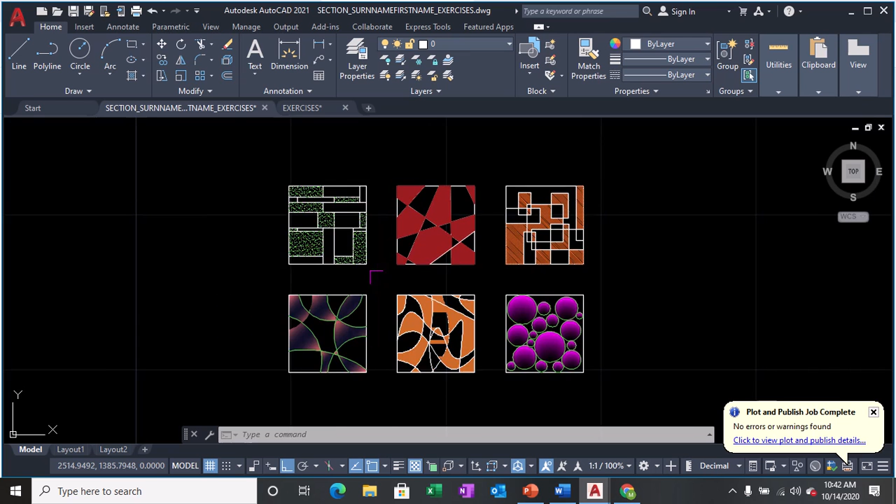Okay, so to continue with our exercise number 2, we have here a series of rectangles to be filled up with hatches and gradients and with combination of different 2D CAD objects. So these are actually 5 by 5, same distance with the previous rectangles from the previous exercise. So I'm just going to pan and just be duplicating it through copy, CO enter. So select this one, and this one.

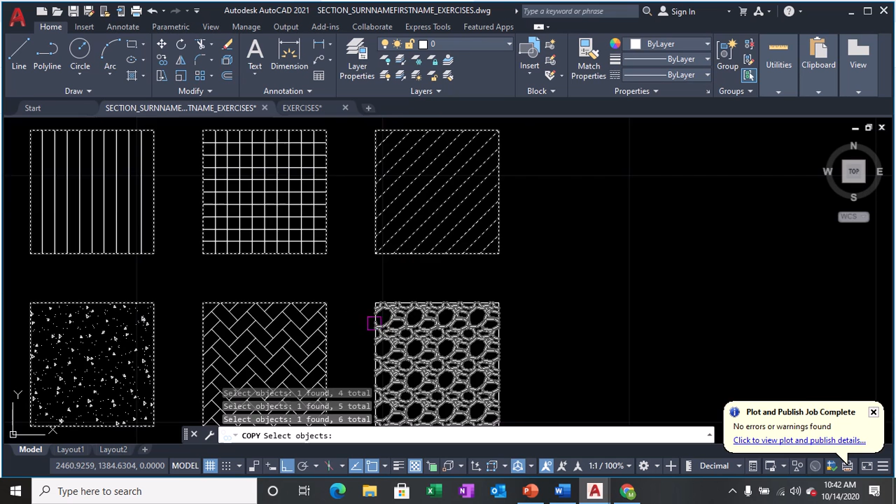Okay, so it's okay if there are already objects, we can just delete them later. Enter. Once you're done copying them, specify base point. So you just pick from here and guide them to the side. It's up to you if you want it on the right or left side. So just click as your point of displacement.

Enter once you're done. So zoom in. We have an excess here. So that's E. Enter. Select this one and enter.

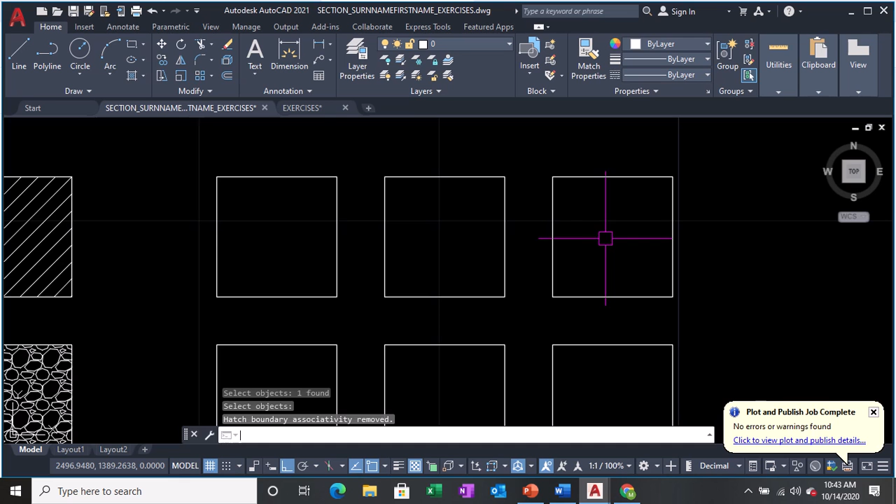And after that, we have straight lines here, vertical and horizontal. So zoom in on this. Then I will be turning snap off. Bakit? Because when you type L, enter, if you have snap on, the points will go there. So again, just pick 1 and 2, enter, and another enter to terminate.

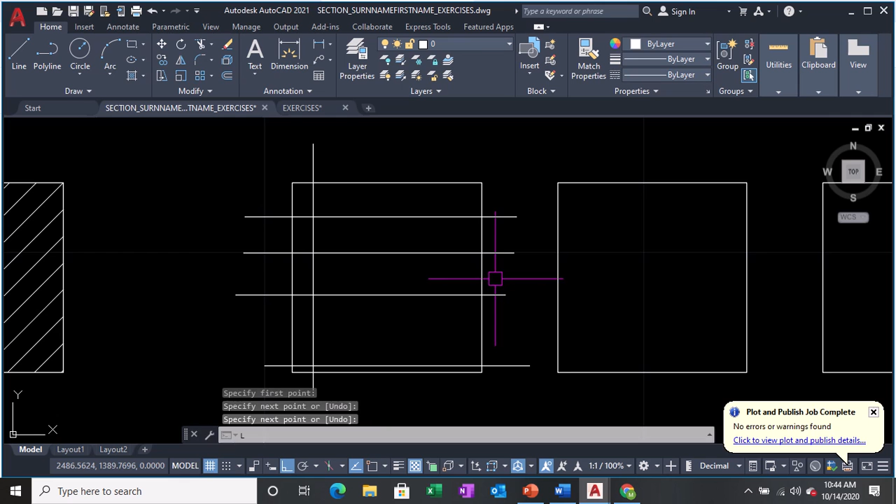So, pick 1 and 2, enter, L, enter. You can click anywhere. L, enter, just pick 2 points at a time. L, enter. L, enter. Enter again.

So again, you can click a series of straight, horizontal, and vertical lines. Then after that, type TR, enter, and click all those unwanted objects outside your rectangle.

The one that I'm using, it's called cursor. Our cursor this time is pick box. So whenever you are prompted to select object, your AutoCAD cursor turns into a pick box, okay?

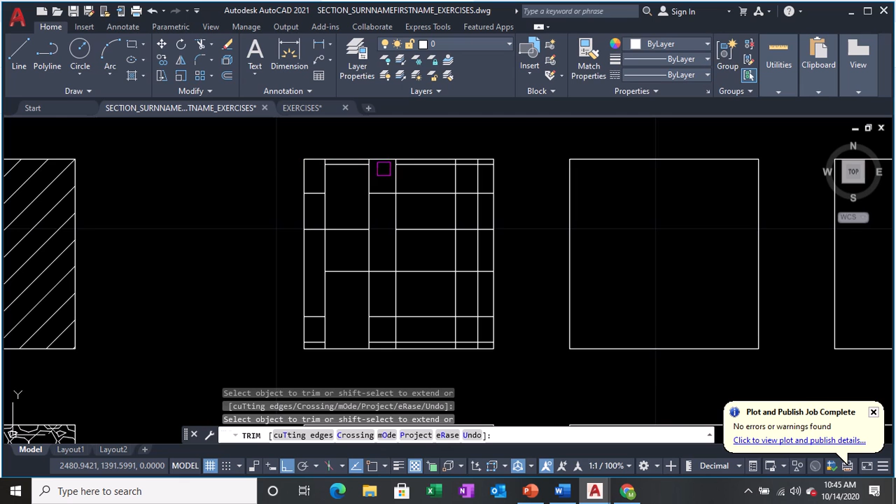So here, I will be trimming here, this one, this part, this, and also here. Again, it's your discretion on how you are going to deal with this, on what type of object you will be eliminating.

Okay, you don't have to copy exactly my output. Again, that is your discretion on what you are going to do with your rectangles, provided for the first one you will be using straight, horizontal, and vertical lines.

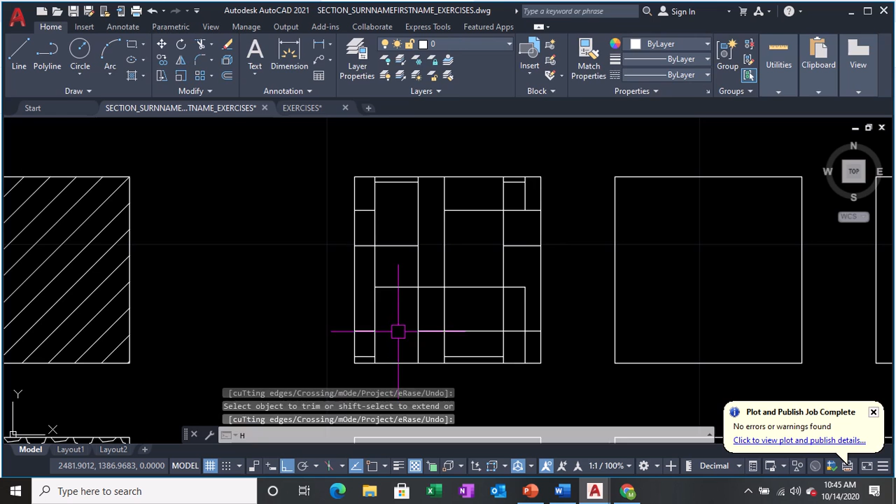Okay, so enter to terminate the trim command, and I will be doing hatch. H, enter. Okay, so I will be using user defined for the meantime. Spacing is 0.1. Under properties, I won't check the double option. So just here.

And then I will be picking here. And another one here. Another one here. There you go. Okay, and anyway, I'm fine with that.

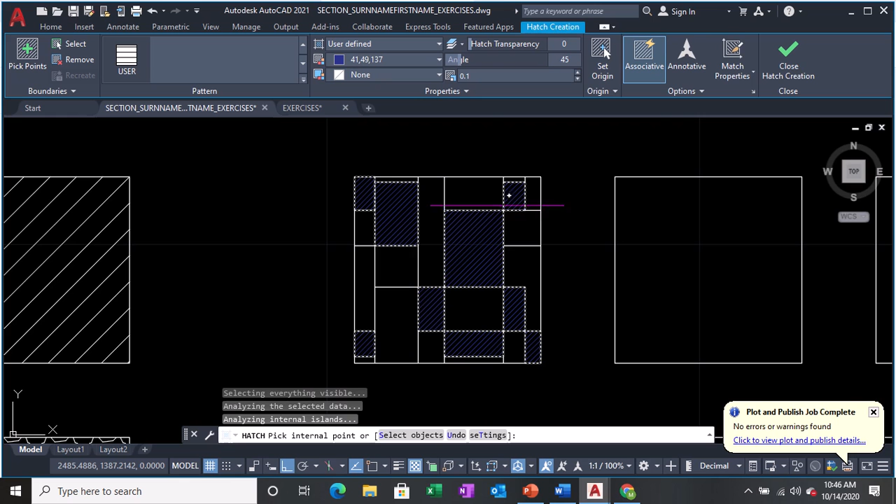So press enter. You can leave the other boundaries unhatched, or if you want, you can command for another H, enter, and look for solid this time. Okay, so C. Let's see. Yellow. Okay, click.

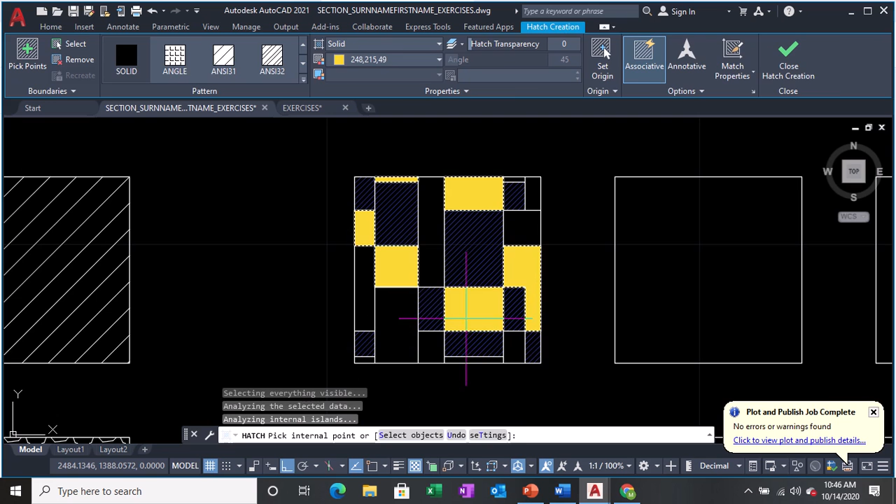Okay, so I'll be fine with this for the rectangle number 1. Okay, so don't forget to Control S every at least 5 commands.

Next is we have a series of diagonal lines. L, enter. So again, I would really suggest you turn ortho off this time, and you pick 1 and 2, enter. Enter to repeat. 1 and 2, enter, and enter to repeat the previous command, which was the line command.

Then you pick 2 points, enter. So again, you don't have to copy, or you don't have to be identical with my output.

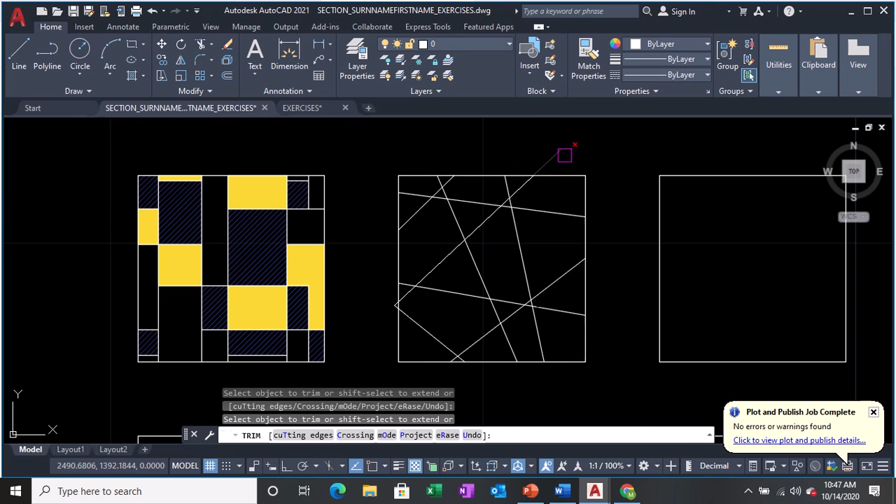And TR, enter. So select those unwanted objects by trim. Not just outside the rectangle, but again, you can also do it inside.

Okay, there you go. I think I'm fine with this. Enter. And for this one, I will be using H, enter.

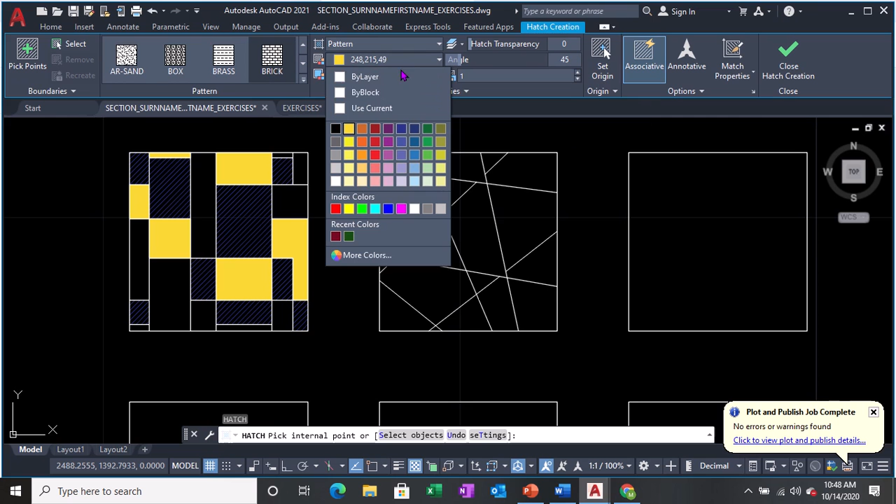Instead of solid, I will be using pattern. Okay, so from here, maybe, oh, I think brick is fine with me. Brick, then color, I will be changing it to something, okay, this will do. Sort of maroon or mulberry.

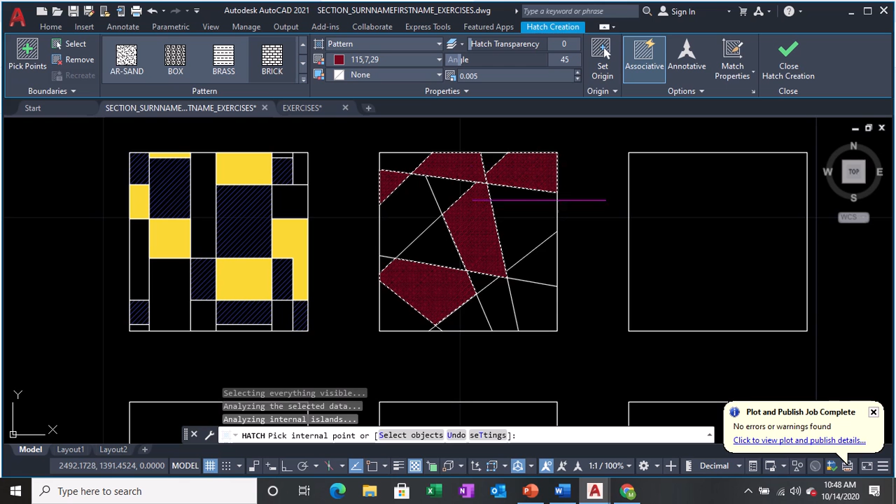At 45 degrees, it's fine with that. I will be typing 0.005, enter. Okay, enter. Okay, hatch again. So this time I will be using solid, and color will be, maybe, yellow again.

Okay, you can just click randomly. Or if you want to fill everything, every bounded area, it's up to you.

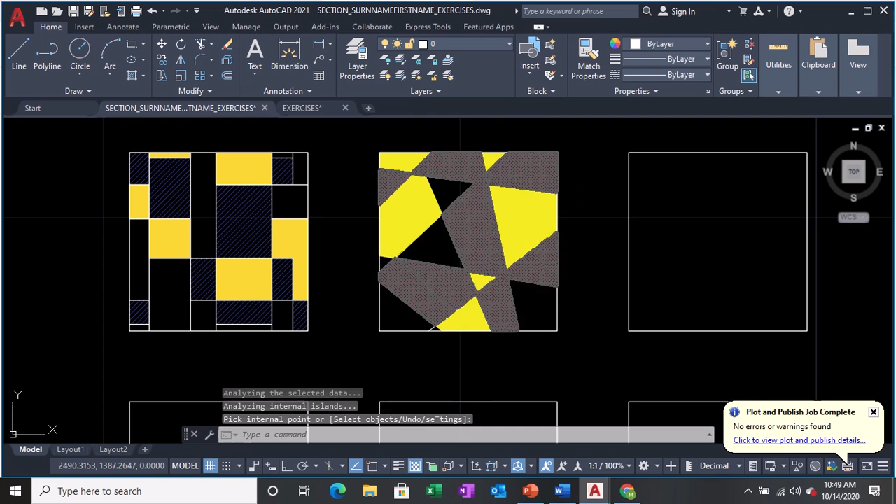And for this one will be a series of rectangle, REC, enter. So you pick one and there you go. Enter to repeat rectangle. You click here, you click outside, it's up to you.

REC, enter. Just pick two opposite points, 1 and 2. REC, enter. Pick from here, down here. REC, enter. You pick from here, up there.

And TR. So you remove the excess. You can always undo the last action, okay? By Control Z, even if the command is active.

REC, enter. Pick 1 and 2. So let me add a bit more to it. Pick 1 and 2. Enter. And TR, enter. And eliminate this.

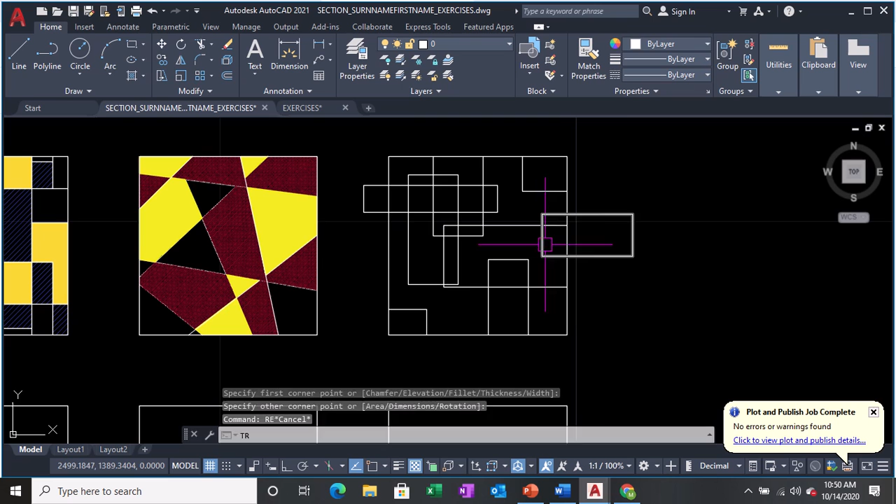Then again, you can do GD for this time. GD, enter. So this is my pattern. Again, randomly, you can click anywhere.

Okay, I'm good with that. Enter. And maybe another hatch. Enter.

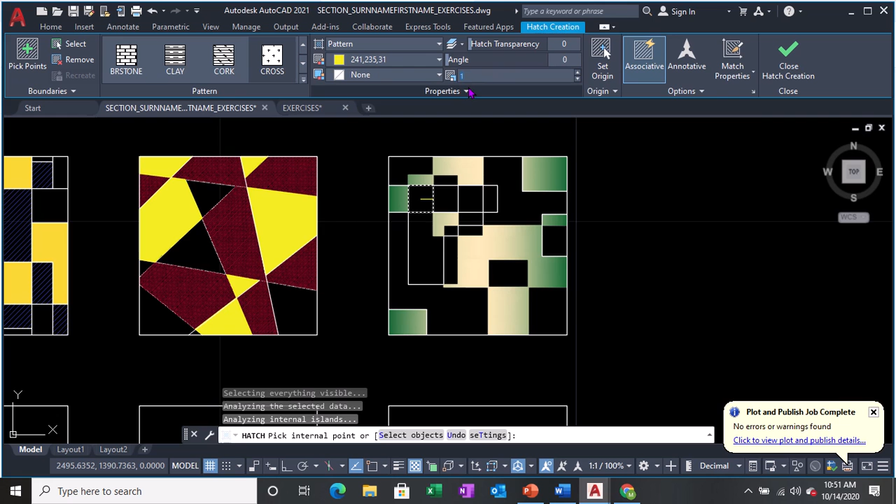I want to use pattern again. Click here for pattern, or the cross one, click cross, or it's up to you. This one is too big, so I will try typing 0.005, enter, okay that's it. Or if you want a bigger one, let's make this 0.01 instead.

Click the other parts of your drawing that you want to fill up with those patterns. Enter. If you want, you can leave the others blank, just like this.

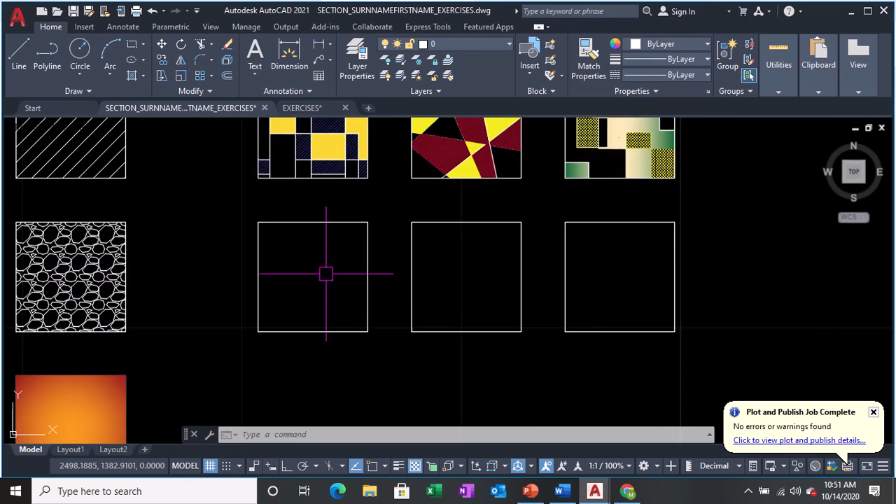Because if you have ortho on, it's a bit hard to modify your arc. If your OSNAP is on, you pick here, it might go to the midpoint instead. Anyway, that's point 1, 2, and 3 upon arc command.

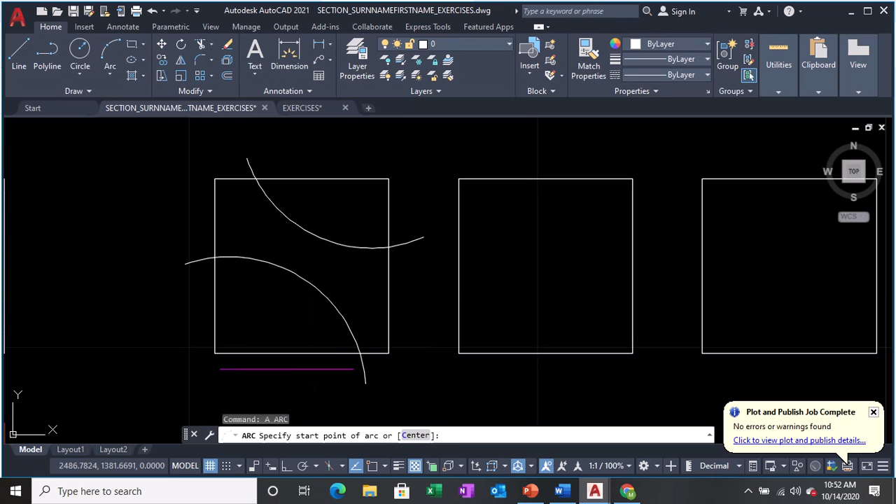Another A, enter, 1, 2, and 3. A, enter, 1, 2, and 3. Just repeat it. A, enter, 1, 2, and 3, enter to repeat your previous command which was arc. 1, 2, and 3, and enter to repeat. Again, you have to pick 3 points upon the creation of an arc object.

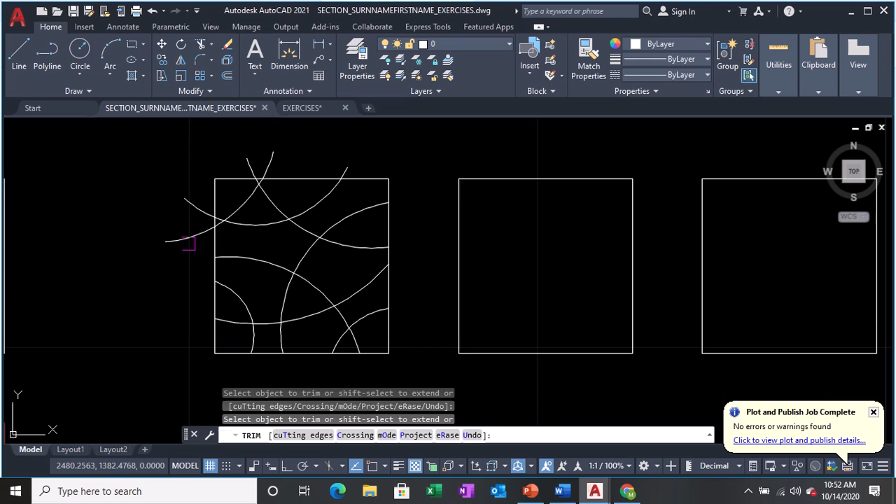After that, we're just going to trim all the unnecessary objects. That's TR, enter again. Class, in previous versions you have to double press enter for trim command, but with version 2021, even just one enter. So H again, click here, there.

I'll just close this. Okay, and there you go.

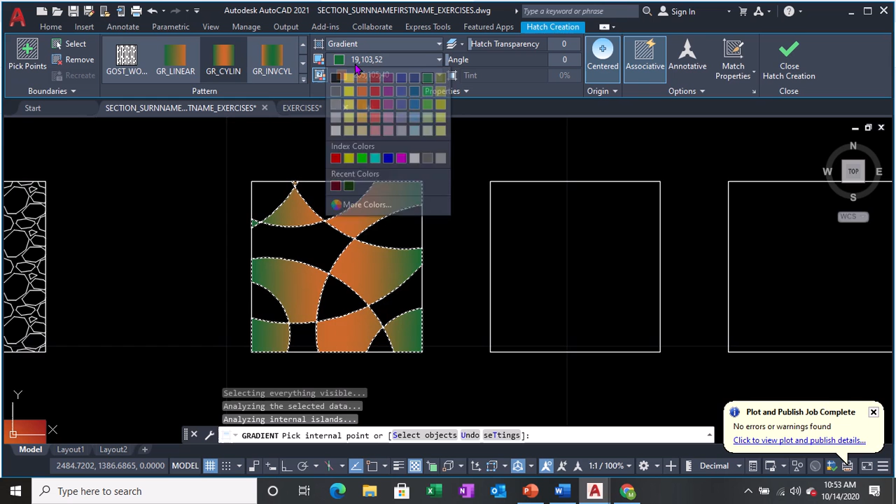I want to change my color to orange and maybe red, or this one and this, and change my angle into that. Close, and again I will be leaving this blank, but if you want to have them hatched or filled with gradient, it's up to you.

Next will be SPL for splines, so you can pick anywhere. Make sure again ortho and OSNAP is off. So just 1, 2, 3, 4, 5, 6, 7, 8, and there you go.

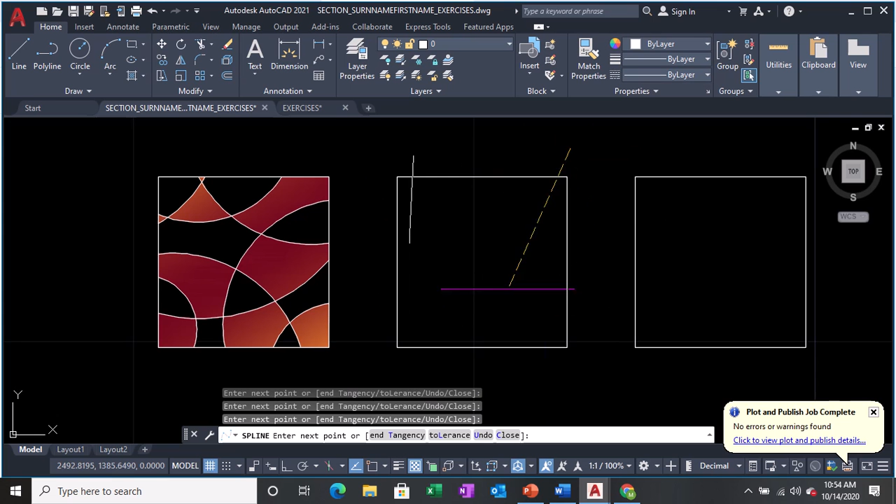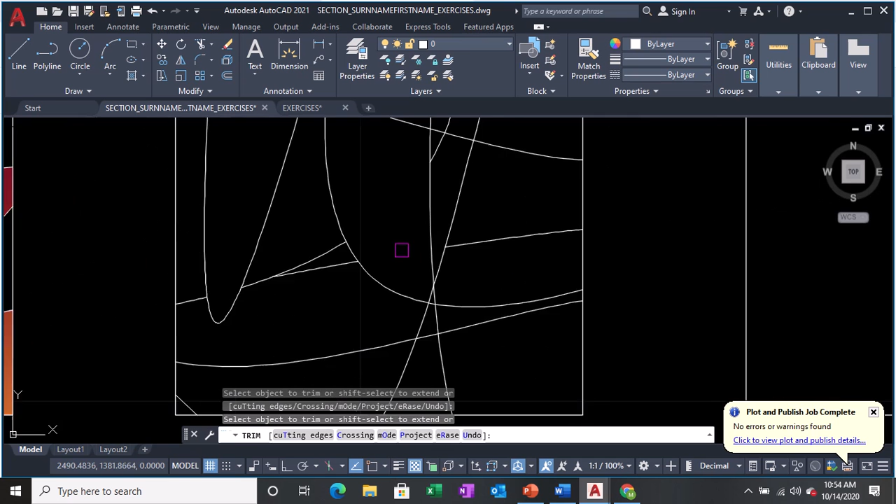After trimming them, you can already fill them up with different patterns. You can still trim inside in case there are other parts of your spline that you want to fix or redefine. So it's okay, I'm good with this.

I'll be filling this up with another H command. This time I will be using user defined. Angle is 0, so let's try 0.05. And then for the color, maybe blue, okay.

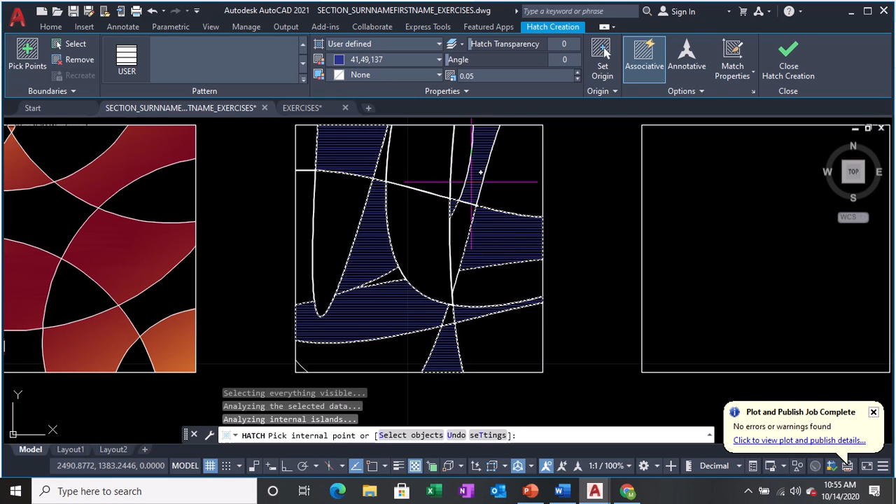Again, make sure that the area is bounded. Okay, so I'm good with this. Enter, and enter to repeat. Same as before, but I will just be changing my color. Okay, so I'm good with this.

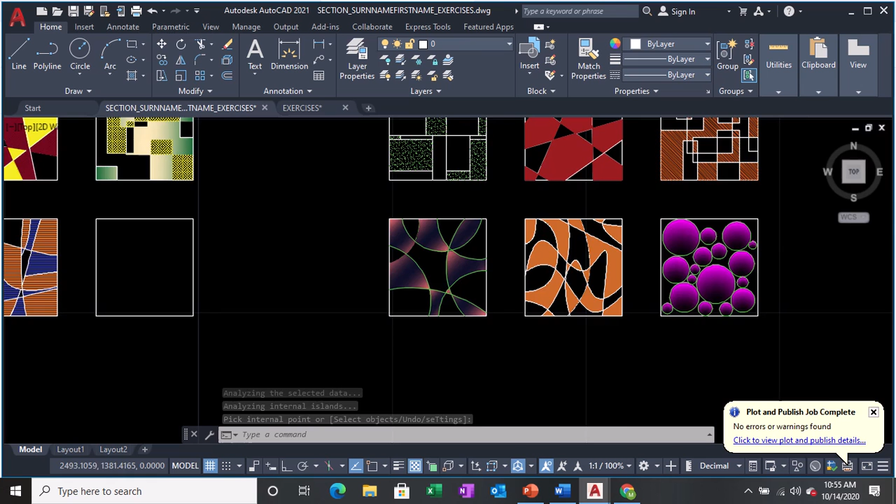Next will be a series of circles. So your circle command, enter. You pick anywhere, say here. And enter to repeat. You can have it pick from here, it can go outward, and enter.

You can have it overlapping, or you can enter and copy it.

Whatever outcome you want. I just want to see circles for this rectangle, this one is line, that one is overlapping arcs, and so on.

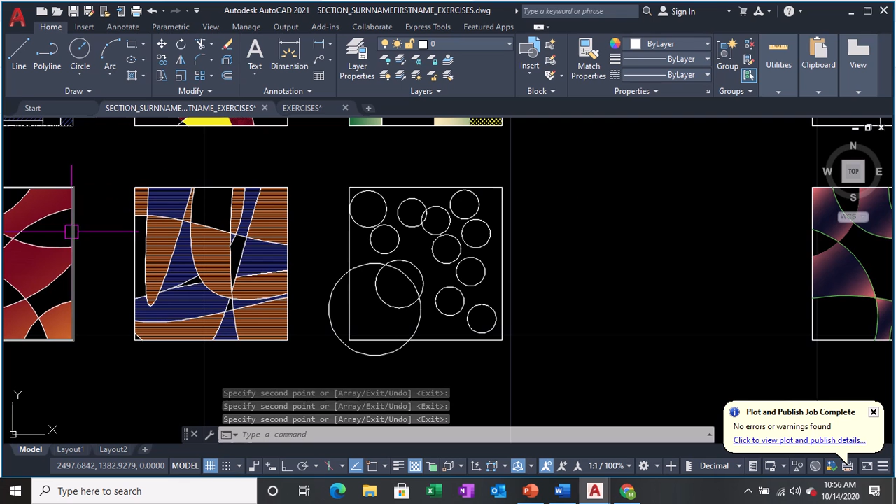So TR to eliminate excess, and again you can command H, enter. This time, it can be the area beyond the circle or within it. Okay, so enter. So we're done.

Don't forget to quick save once you're done. So once the drawing is already completed, the next step is you're going to prepare them for printing or plotting. So from the CAD file, we will be converting them into PDF.

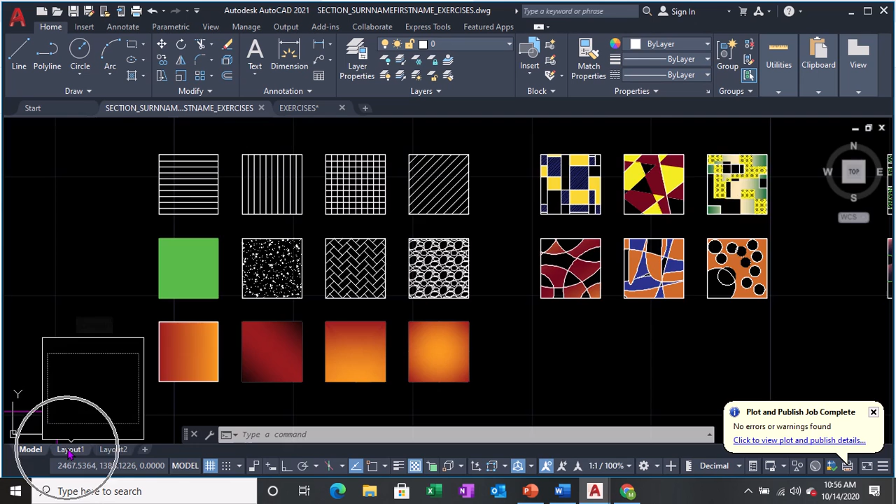So how do we do that? First, we are in the model tab, so let's go back, or let's go to layout. Layout is intended for preparing your objects, preparing your drawings for printing. You will actually see, when you switch from model to layout, a default viewport.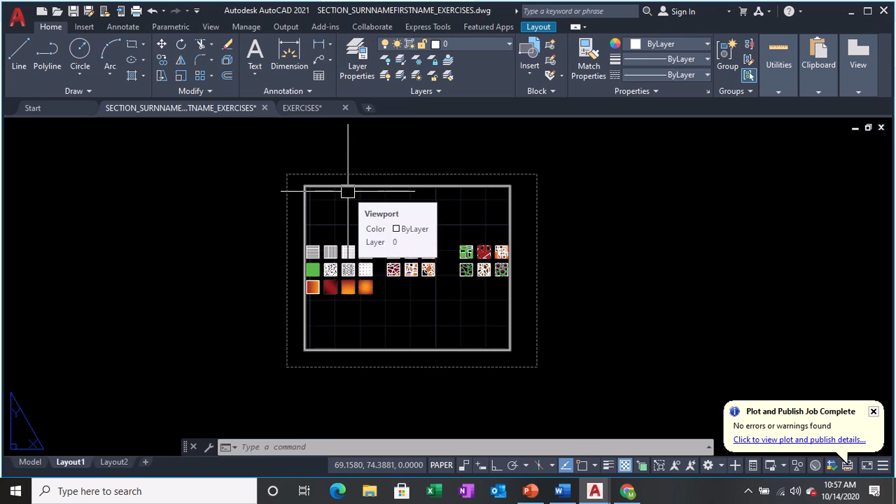That default viewport of ours can actually be eliminated and we're going to create a new one. So we're going to delete this by erase command, enter, select, enter. We're going to create a short bond size.

Let's convert your drawing into the size of short bond paper. Our short bond has a size of 8.5 inches and 11 inches. So we're going to make a layout on a landscape format.

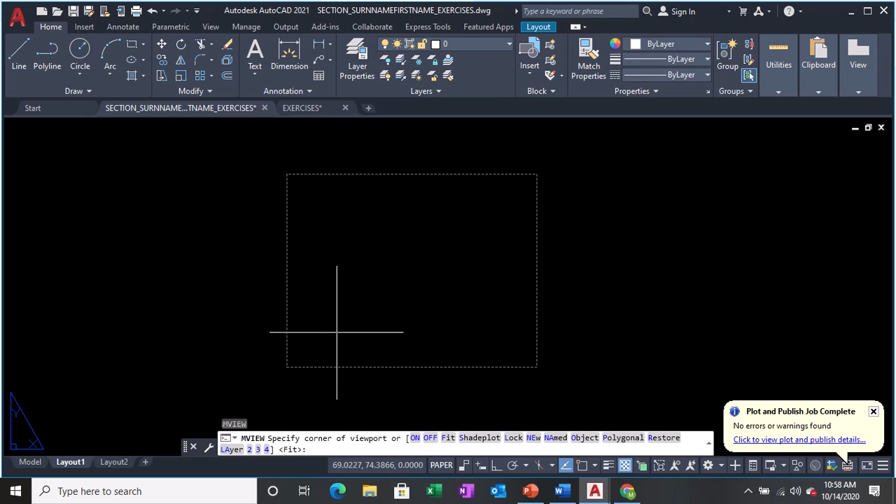So, pahiga yon. Ang gagawin ni ma'am, magko-command siya ng MV, enter. I will be picking 1 point. Okay, so eto na yung bond paper natin. What we're going to do is to specify the size.

So that's at 0.28. Ano yung 0.28? That is your X, yung dimension dito. Saan galing si 0.28? That is 11 inches of your bond paper converted into meters. Pag sinukat mo sa meter, yung longest side of bond paper, that is 0.28 m. Bakit kinonvert natin ang bond paper into meter? Kasi gamit natin drawing unit is meter, so dapat tumutugma sila.

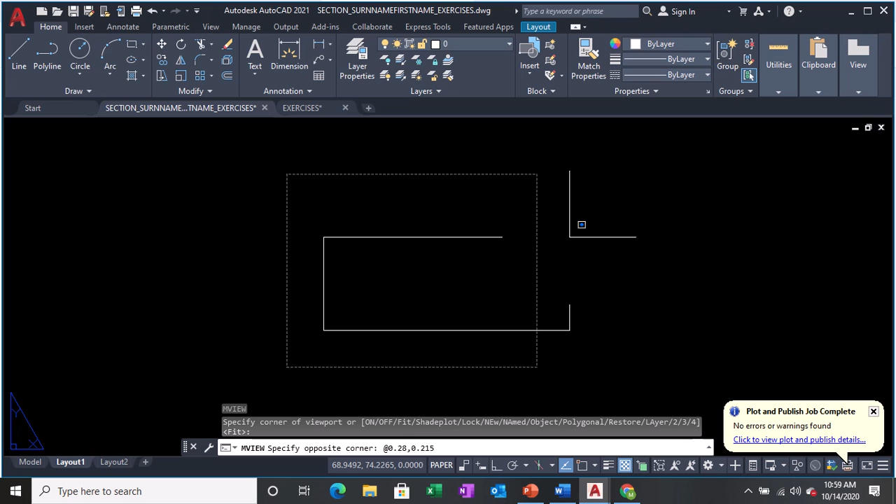So ayan yung longest part, comma, 0.215. Bakit 0.215? That is the 8.5 inches, kinonvert natin siya ng meter. Anyway, I'm going to press enter. There you go, you already have your layout set for short bond paper, which is 11 inches by 8.5 inches in landscape. Pwede kasing portrait or patayo, but we will be using the landscape option this time.

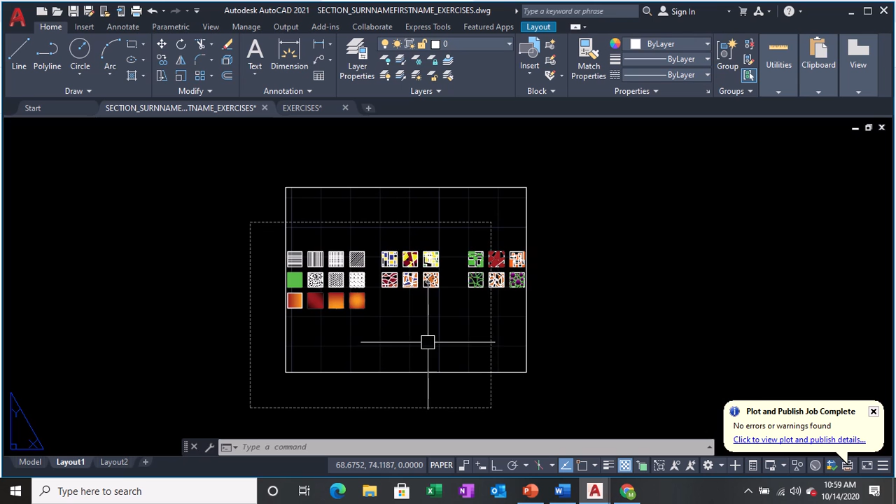Now, ano ito? This is a viewport or parang window dun sa model. Lahat ng ginawa mo sa model, pag pupunta ka ng layout, makikita mo, provided you have a viewport. Viewport, portal for viewing, para makita mo yun sa model. You can actually print also sa model, but based on my experience using CAD, I would really advise you to use layout when it comes to printing.

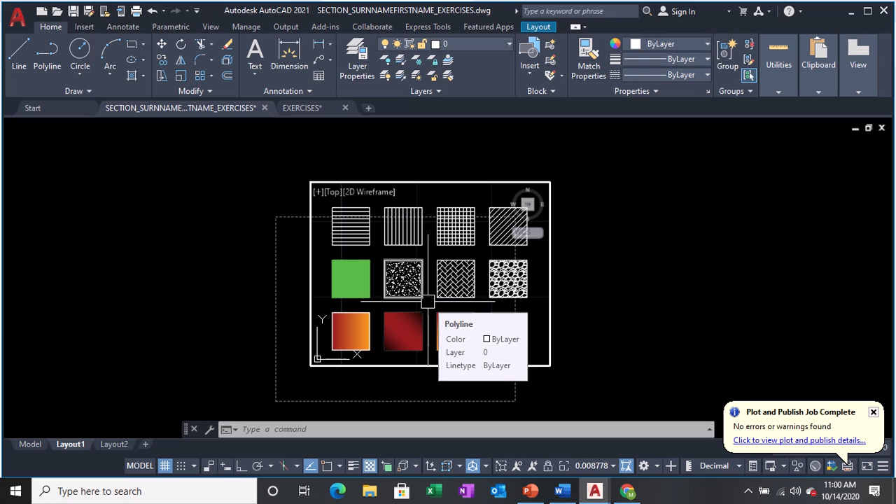Anyway, this is already our paper. When we pan, when we zoom in, napapan yung paper. But when we double-click inside, ayan, so pwede tayong ipan, pwede nating i-zoom in, and this is our drawing. This is our paper, this is our drawing. You see the ratio of your paper, short bond, and your objects. So double-click sa labas, para pag nag-pan at nag-zoom in, zoom out, hindi na magagalaw yung drawing na sinet natin sa loob.

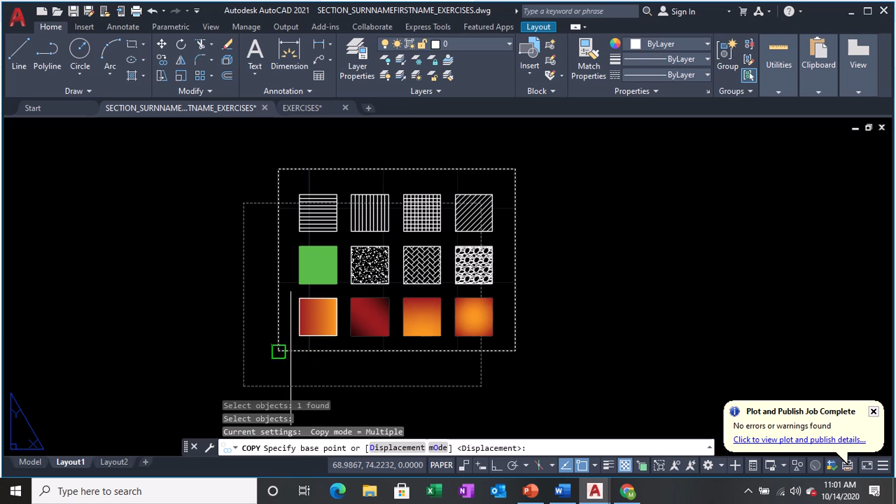Okay, now we're going to copy this viewport. Enter. Again, this viewport has a size of short bond, yan yung sinet up natin earlier, yung MV at 0.28, 0.215. Anyway, I'm going to copy this. Enter. Okay, click here, and dito ulit. So I have two viewports, or I have two portals viewing my model.

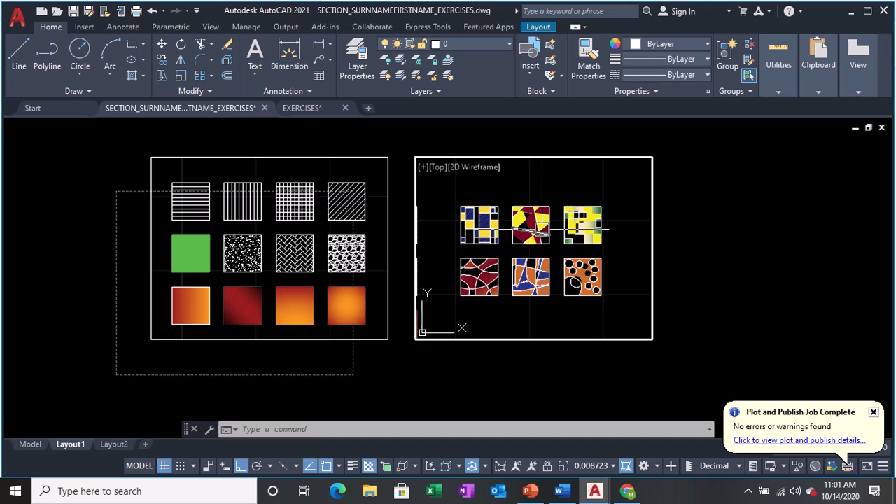Now, for this portal, i-double click ko yan sa loob, papalitan ko, and I will be switching my view doon sa another set of rectangle. And using your scroll wheel, zoom in natin siya at ipan ulit sa gitna. Kasi kung masyado siya maliit, ayan, makikita mo naman, this is your paper, this is just your drawing, so sayang naman siya. And actually, this can be scaled, pwede maglagay ng scale 1:100, 1:50, but dito muna tayo, not to scale muna yung objects.

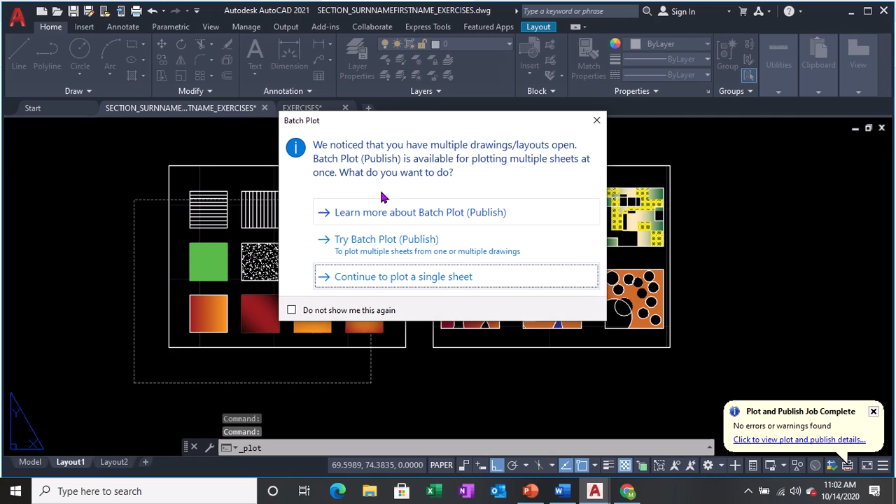Anyway, so after this, once okay na yung drawing, once okay na siya sa pagkakalagay sa paper mo, you double click outside. So that's it. The next is by plotting or printing command para ma-convert na siya fully into PDF. So that's Control P or plot command. If this screen popped up, you just click continue. Okay, then after that, look for the printer or plotter.

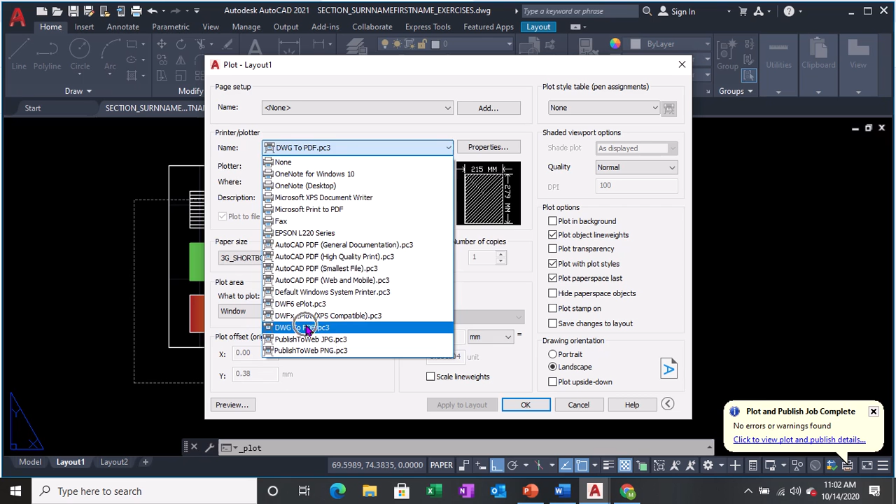When you click this, you will have the default electronic printer of AutoCAD. If you have an installed printer, makikita niyo siya, just like mine, I have an Epson. We will be printing it through PDF, converting the DWG or drawing file to PDF, so select this, and after that you have to select the paper size. Sa paper size, marami nakaset, pwede kang pumili dyan. Remember yung layout natin, sinet natin siya sa short bond, meron naman short bond dyan, but I want you to know how to set a paper size in AutoCAD.

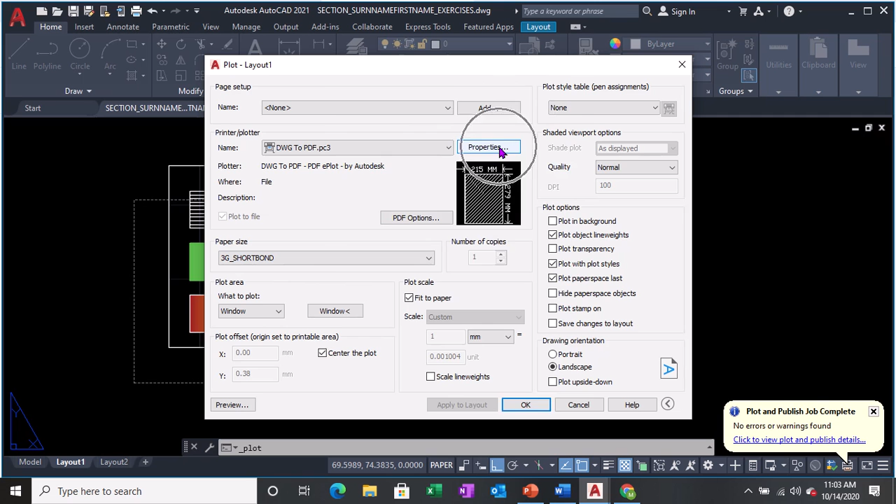Because printing in AutoCAD is not just limited to short bond, diba? Meron mga 20 by 30, A3, 15 by 20, 30 by 40. So you know how to set one. Example natin yung short bond. So to set a new paper size, you click here sa Properties, Custom Paper Sizes, select, Add, Start from Scratch, then click Next, and then you will see here the media bounds, or these are the area wherein our paper is set to size.

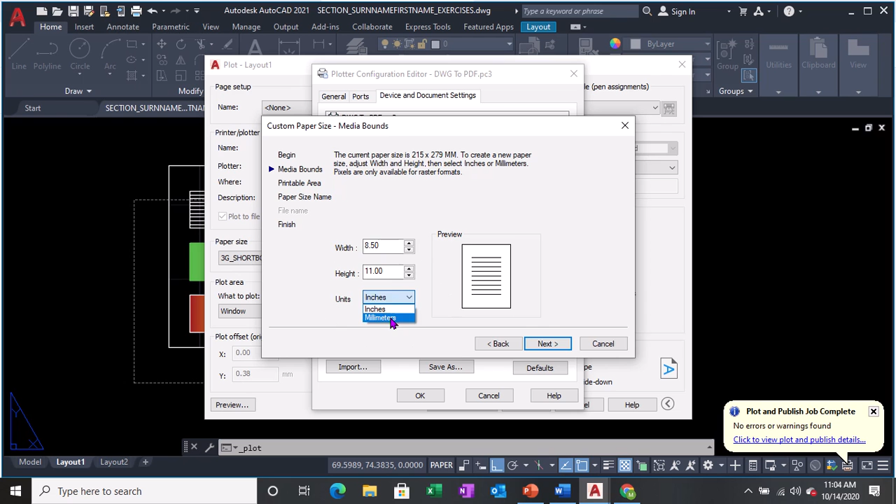Short bond tayo, uulitin natin siya dito. So kunwari, hindi mo tanda yung pagkaka-convert ng 8.5 at 11 sa millimeters or sa meters, punta ka muna sa inches, so you specify here. Let's say kailangan mo ng 30 by 20, ilagay mo dyan. But since we are just using short bond at yun po yung default, so let us just accept this and balik tayo dito, go back to millimeters, and click Next.

Printable area, you see the blue lines. Objects beyond that line are no longer printable. So let us maximize the paper and set everything to 0.

And click Next, paper name, just name it whatever you prefer. Mine is short bond. You can also set long bond paper there, or A4, depende dun sa gagamitin mo. And ulit, kung ano yung paper dito sa plotter, siya din dapat sa layout or sa screen mo.

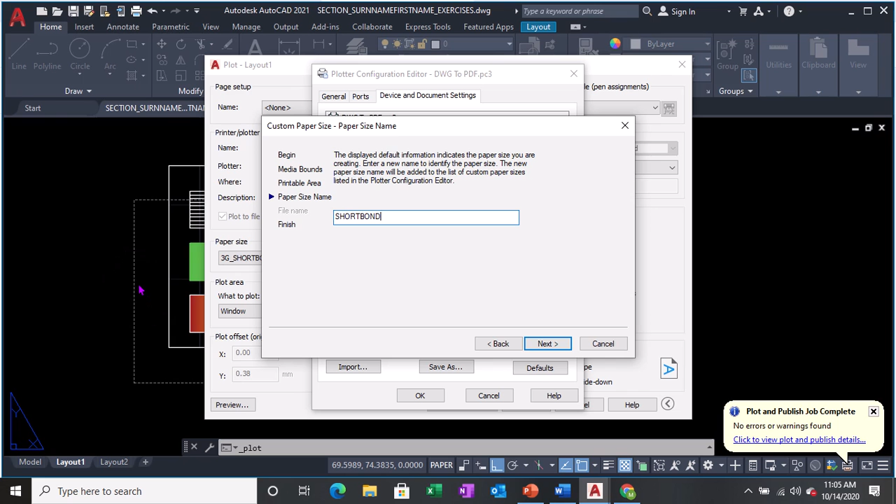And click Next, and just click Finish. So these are the set of short bonds created from previous classes. But anyway, just select and click OK.

And when you click this, eto na siya. They might be here sa baba or sa taas. Usually ganun, okay? So hanapin ko lang.

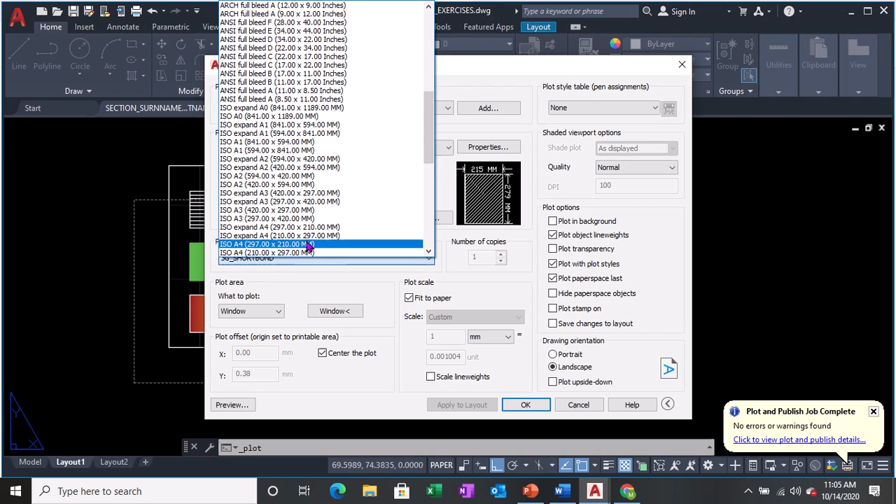Select short bond. Ulit, pag nag-Control P ka, uulitin ko lang: select the printer, select the paper size, and then what to plot.

So you click here, you have display, you have extents, you have layout, you have window. Disregard the others. Just always use window, and click window here.

Pag sinabing window sa AutoCAD, you have to pick two opposite points, 1 and 2.

Check fit to paper and check center the plot. So those are one of them, or just 5 of them: printer, paper, window, plot scale or fit to paper, center the plot, and apply to layout and preview.

So this is it, ito na yung nasa screen ninyo. It's currently bounded by short bond paper as set earlier. But meron pa tayong konting kailangan ayusin.

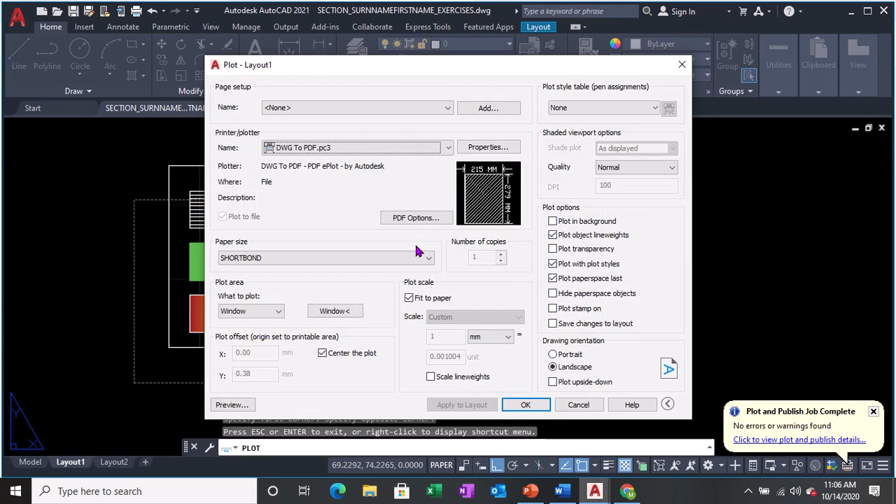Escape lang ako, and another escape. I will be creating a layer for our viewport para hindi siya printable.

Okay, currently we have a layer 0. Don't worry, we will be discussing layer 1 at a time. So to create a new layer, that's LA, enter, create a new layer.

I will be naming my layer as viewports. Okay, color niya, lahat ng object sa AutoCAD pag wala pang ibang nakaset na layer is color white, kasi pumapasok sila sa layer 0 wherein the default color is white. And we will change ours for viewports.

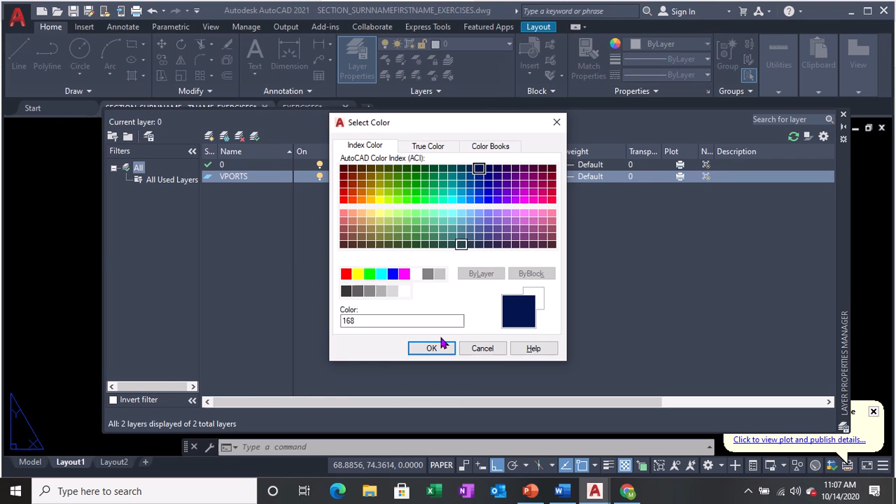We're going to make it blue. Ito, and click OK. And meron siya dito, plot option.

Plus, if medyo naka-minimize to, minsan hindi nyo siya makikita. For example, ito, yan, nakaganyan. Hindi siya ganong makikita. So look for plot, still sa tapat pa rin ng viewports, click no plot.

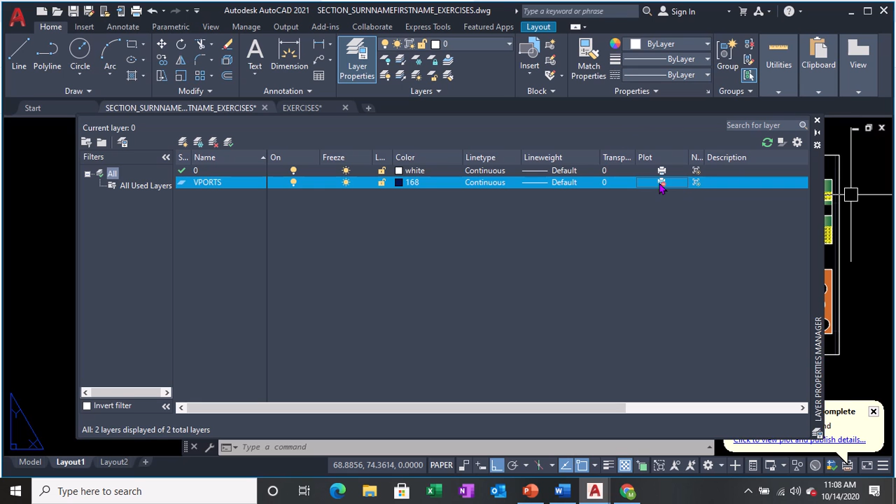Okay, so we will see what happens pag naka-no plot yung layer at pag naglagay ka ng object doon. Anyway, so just click or close this.

Select this and this viewports. Make sure you don't have any command in progress. You go here and you select viewports.

So nilipat natin sila ng layers, okay? Kaya nagiba sila ng kulay.

Now balik tayo sa Control P. Click lang to. And printer plotter, nakaset na yung previous settings natin: DWG to PDF, automatic na naka-install yan pag nag-install tayo ng AutoCAD.

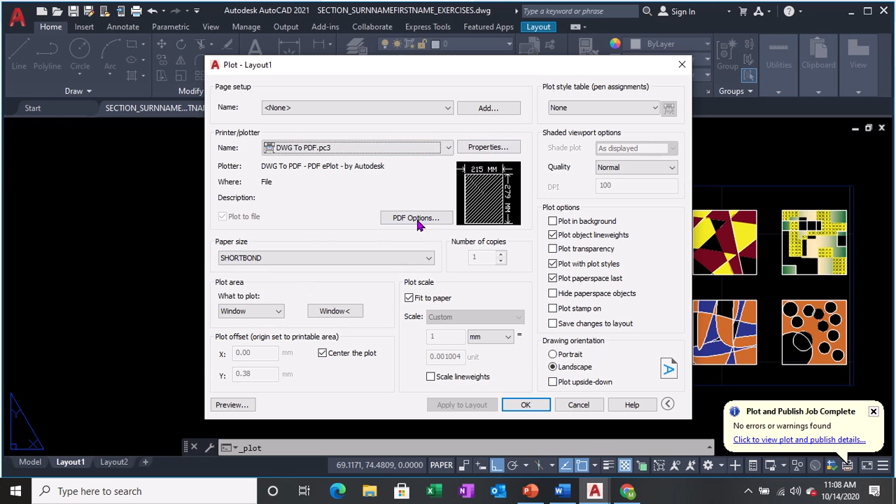Paper size, yung sinet natin sa properties kanina. Then okay na din yung fit to paper and center the plot. So click window, pick one and another one.

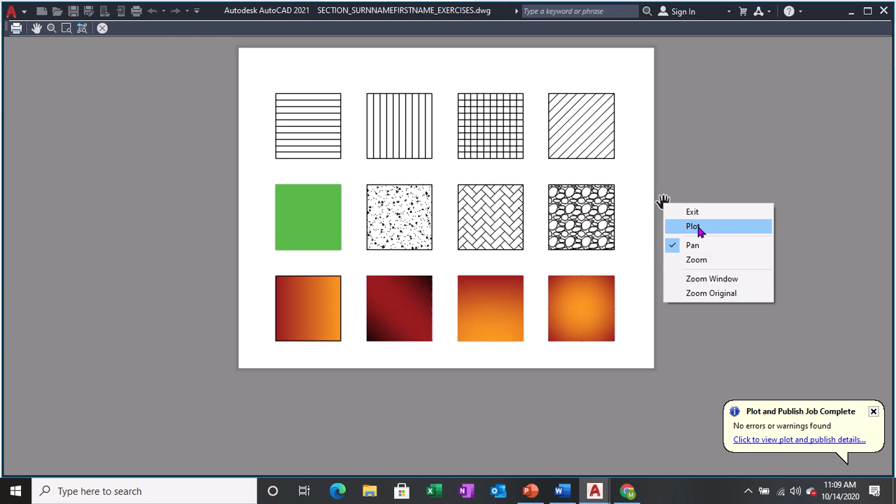Once you have selected plot, hanapin yung folder, you look for your own folder. Okay, lalagay ko na lang sa CAD exercises yung sa akin.

I will be naming my PDF as exercise 1. Huwag nyo na siya lagyan ng name kasi pag sinubmit nyo yan sa Google Classroom, magre-reflect naman yung name na nag-submit. Okay, CAD exercises, exercise number 1, and then click save.

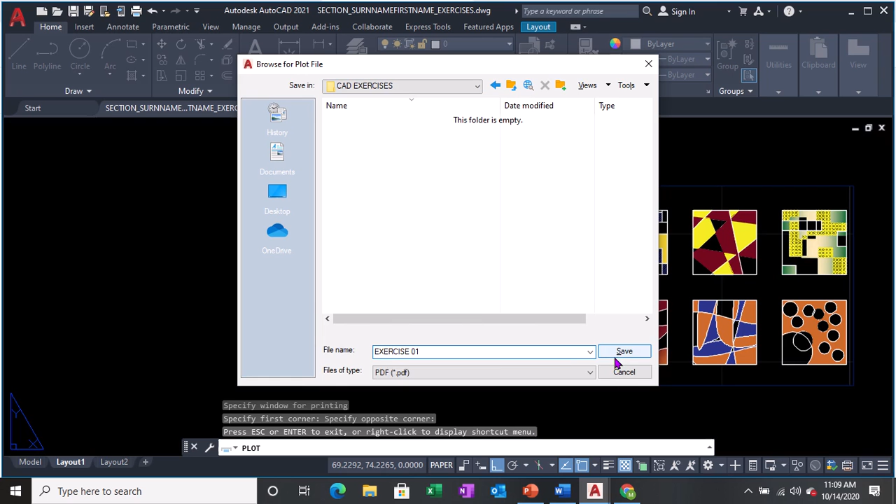Okay, so afterwards this will be showing on your screen. Ibig sabihin, out of the AutoCAD file, na-create yung PDF file na to. Okay, so I will be clicking close.

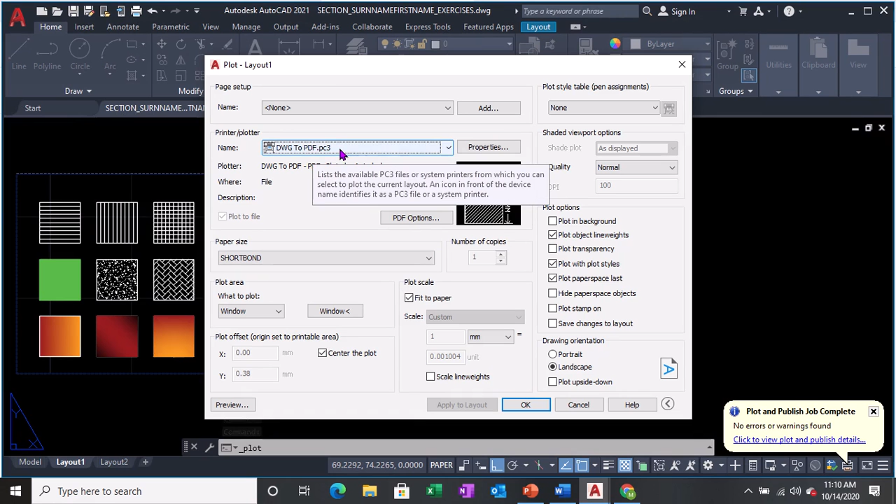And another Control P command, continue lang. So same settings pa rin as kanina: printer, paper size, fit to paper, center the plot, and window.

You pick two opposite points, 1 and 2. Okay, apply to layout, preview.

And there you go. Wala din po yung paper natin na line kasi nakaset siya sa no plot. Visible siya sa screen pero pagdating sa printing, hindi po siya masasama.

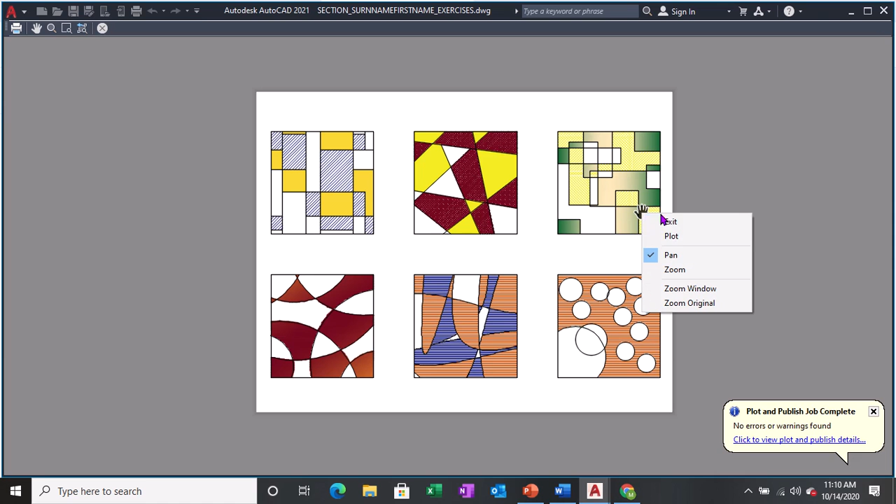So you right-click anywhere and you select plot. Okay, afterwards, so ayan, files of type PDF.

And palitan na lang natin to: exercise number 2. And then click save.

Okay, so this will pop up after the command is done creating a PDF file out of your AutoCAD file and Control P command. Okay, so that's it.